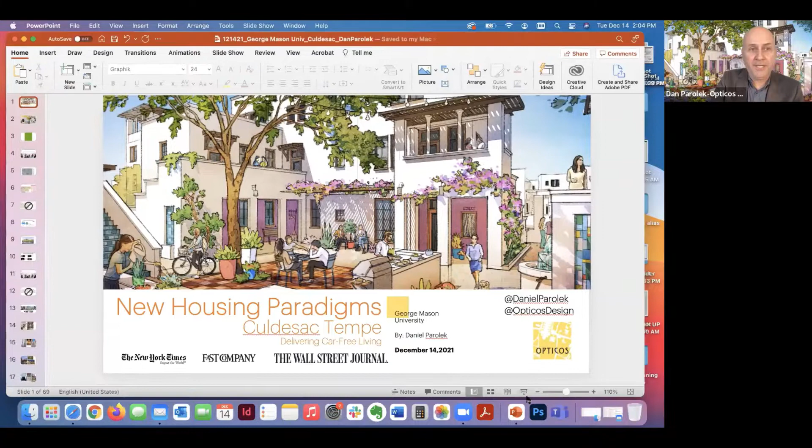Well, thank you, Eric, and good evening to everybody. This is a topic that I'm always excited to present and discuss with a diverse audience, different people with different backgrounds. So just a couple of things: Culdesac Tempe will be the largest car-free community built from scratch in the United States when it's completed. Super excited about that.

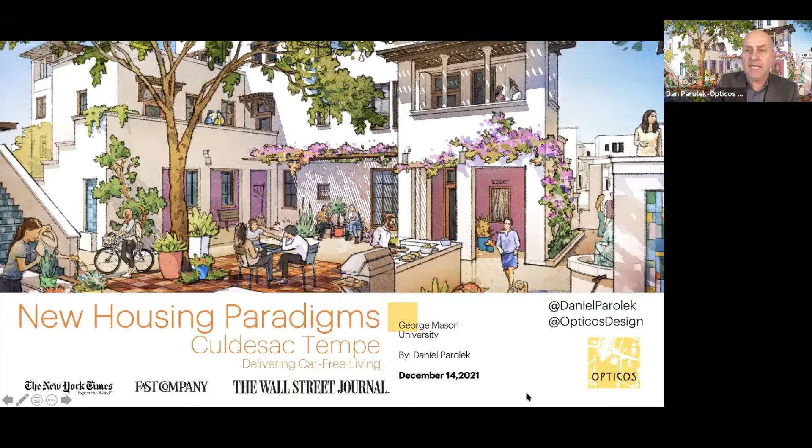If you are into social media and doing any tweeting, feel free to call me out at Daniel Parolek or my company's Twitter account at Opticos Design while I'm going through the presentation today. This Culdesac Tempe project has gotten a tremendous amount of press and interest, which I'm always excited to see, including some of the big name publications you see along the bottom here. I'm always happy to dive into discussing a little bit of the history and the design approach and program for this particular project.

As Eric mentioned, I just want to say one thing: I'm the founding principal of Opticos Design. We just celebrated our 20th anniversary. I started Opticos because I wanted to work at both the architecture and the urban design and planning scale, and I've been able to do that for the past 20 years as my company Opticos has grown.

We work with both public sector clients and private sector clients across the country at a variety of scales, ranging from a 1-acre cottage court infill with a developer like our River House project in Healdsburg, California, to a citywide comprehensive plan update with the city of Memphis. So the work ranges across a pretty broad spectrum of scales, and I have a very talented team that works with me on all these projects.

We're also a founding B Corporation, which means we are committed to a triple bottom line of social, fiscal, and environmental responsibility, not only in our projects but in all of our decision making. That's a really important foundation for us at Opticos. It has been for the past 15 years, and it informs our business strategy as well as project selection.

I wanted to start off with this little video that was created to give a quick summary of the approach and the intent of Culdesac. Let me just get this started here.

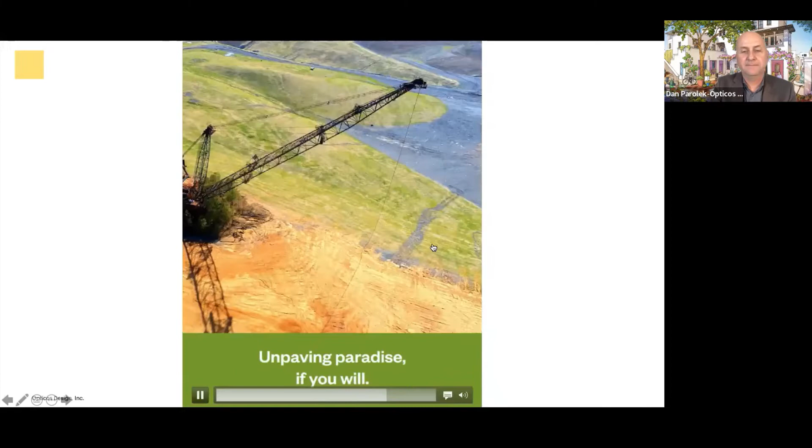So I think that was a really great overview. Culdesac has been a tremendous client to us and a great leader on this project. I feel like this is the type of visionary thinking that is really necessary to deliver 21st century housing choices, and it's been a great opportunity to work with the Culdesac team.

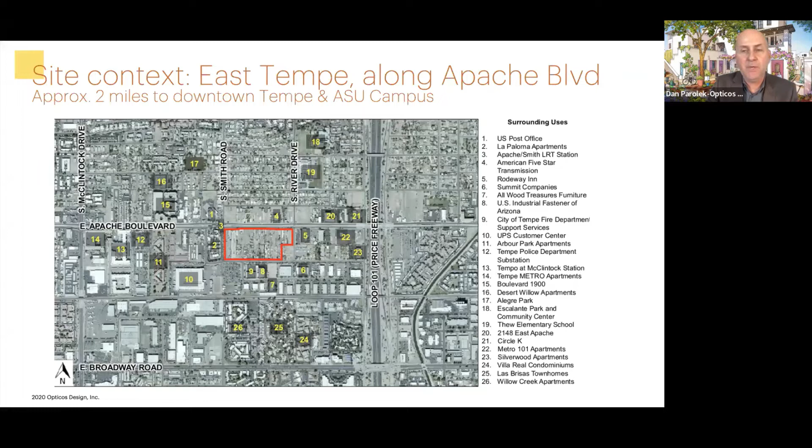As a start, I want to talk a little bit about the program and the general overview of the project. As Eric mentioned, the site is about 16 acres. It's located along Apache Boulevard, one of the major east-west corridors cutting through Tempe. It's also the light rail corridor, approximately 2 miles from both downtown Tempe and the ASU campus—fairly close to those amenities, but in a somewhat undeveloped and underutilized context.

What I really like about the approach that Culdesac tasked us with was that you could very easily attempt to do a car-free project by simply taking the cars out of the equation of an otherwise fairly conventional project, in terms of both product type and the master planning process. But Culdesac really challenged us to think outside the box, not only in terms of the type of place we could create without a car, but also thinking creatively about the housing types we would create.

We wanted to create something different than anything that has been designed and built in the United States in recent history, and maybe even ever. So it was great to get that task of really thinking outside the box on all fronts.

This is an overview of the master plan. It's going to be approximately just under 640 units. The units range in size from 680 to a little over 1,100 square feet, generating a density of about 40 units per acre. I'll do a really interesting comparison later to a previous scheme with 7-story buildings on the site and thousands of parking spaces.

There's about a 30,000 square foot non-residential program, and this was really critical to creating a community with internal walkability, so that day-to-day services and amenities could be delivered within the mixed-use component at the center of this community.

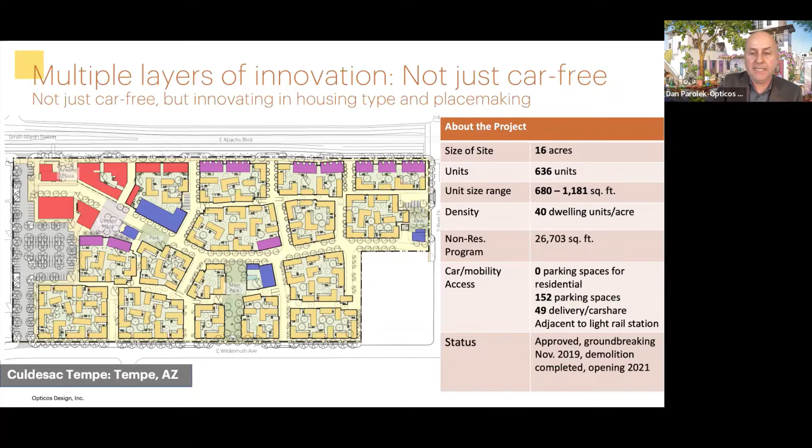I'll talk a little more about the construction, but the groundbreaking actually took place late last year. You'll see some really great slides of the progress being made—it's really exciting to see the project go vertical as construction begins.

As that video showed, one of the primary issues for Culdesac was thinking about the environmental impact of our transportation choices, given that transportation is the main source of our greenhouse emissions, with buildings secondary. A thoughtful approach to removing the automobile from the equation can go a long way in reducing our carbon footprint and greenhouse gas emissions, which is a fantastic way to look at the sustainability component of this project.

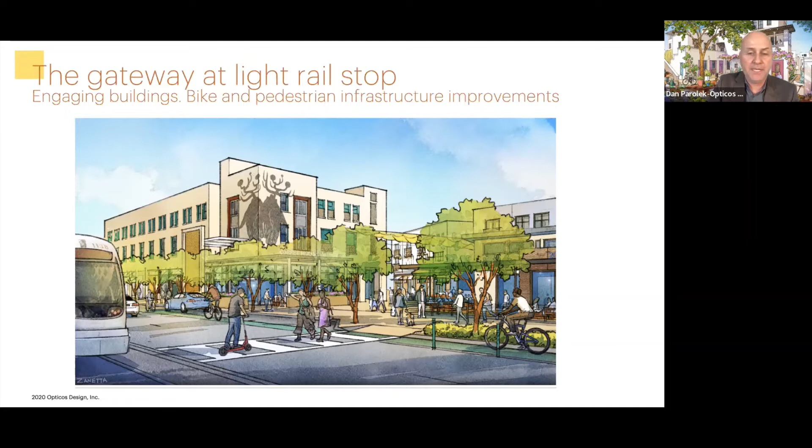Just diving down to a street level view, the site is right across the street from the light rail station, the Smith Martin light rail station. So it was very important to think about that transition from the light rail platform across Apache Boulevard into the project and into the community, thinking about an appropriate gateway that welcomes both residents and visitors into the community. Really important thought process.

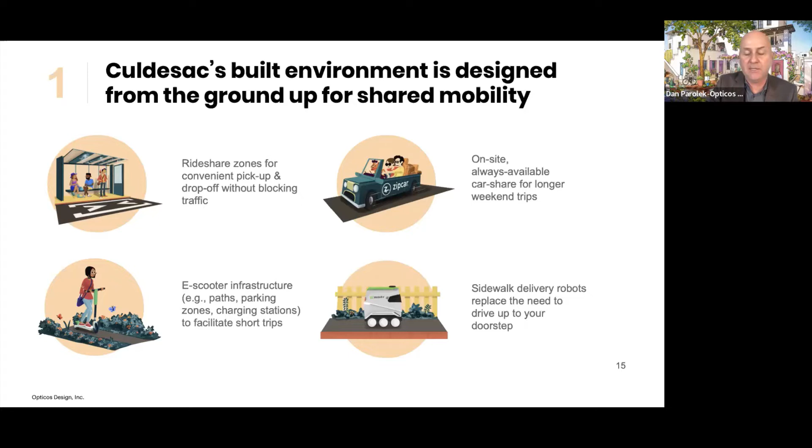Also, there's this idea that the project is car free, but more importantly, the thinking was the project would ultimately be mobility rich. They had this concept from the very beginning to create partnerships with different mobility companies to deliver a palette of mobility choices to their residents. I'll give you an update later on the successes they've had in delivering those choices.

In terms of design inspiration, what we always like to do is step back and think about the types of places that inspire us aesthetically and experientially. In the case of Culdesac Tempe, we needed case studies in placemaking, urbanism, architecture, and public spaces that would mitigate the extreme desert climate inherent in this site, making sure someone on foot, on a bike, or on an electric scooter could comfortably navigate the community with a primarily shaded experience.

As I was thinking about the types of places I've visited or traveled to recently, a lot of historic centers came to mind, whether in Spain, Italy, Egypt, or somewhere in South America, where it might have been 100 degrees outside in summer, but it was quite comfortable walking down the streets because the buildings provided a fairly continuous shaded experience, along with slight breezes and other elements that made the pedestrian experience comfortable.

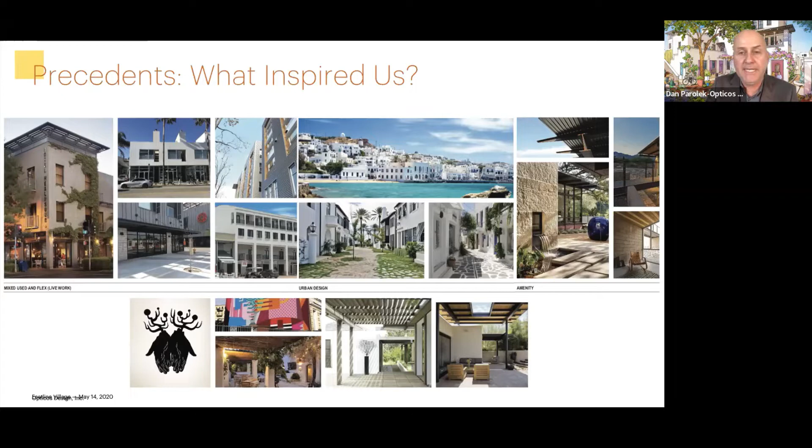So we looked at a broad range of different places, different types of architecture, different elements to deliver that experience. Of course, shade was a number one priority. What we explored very carefully were the different ways, both formally and informally, that we can provide shade, whether you're navigating the site or sitting and entertaining within one of the courtyard or small plaza spaces. It became a really important aspect.

What you'll see as I show you more of the actual design is this idea of the really narrow paseo, small like this image on the right, with 8 or 10 feet building face to building face. This became a really interesting prototype for us to learn from and integrate into the project as a way to provide a shaded experience as you work your way through it.

These are just some of what we call the precedent images, or inspiration, and everything down to the types of signage and art integrated into the project became really important for the Culdesac team and for our team as well, as we thought about how you would experience this place and how it would really encourage and foster a strong sense of community.

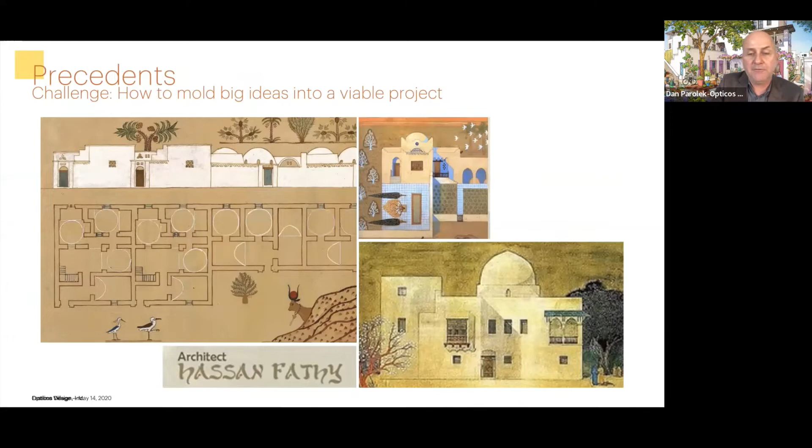One really interesting architect we studied was the Egyptian architect Hassan Fathy, who's done some really beautiful work in Egypt that responds very specifically to that desert climate. There was just something really evocative about his work that we liked and wanted to implement into the project, both from a functionality standpoint in this desert context as well as aesthetically.

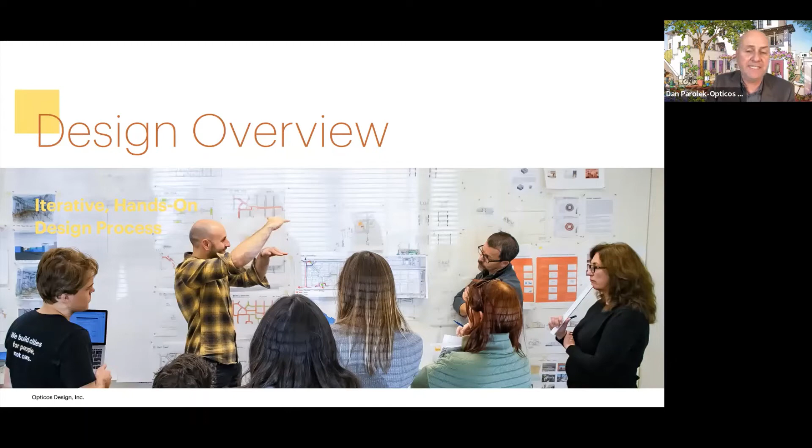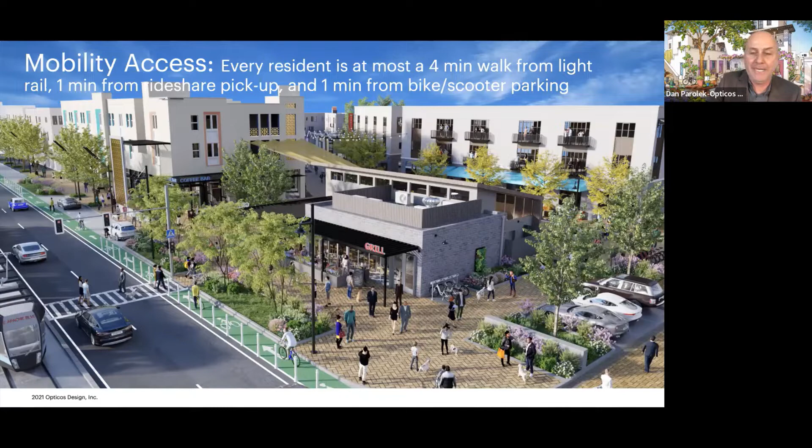This reinforces the fact that every resident within the community should be within a 4-minute walk from light rail, a 1-minute walk or bike from a rideshare pickup, and a 1-minute walk to a bike or scooter parking station. Those mobility choices are really important and thoughtfully placed throughout the community as we were planning it.

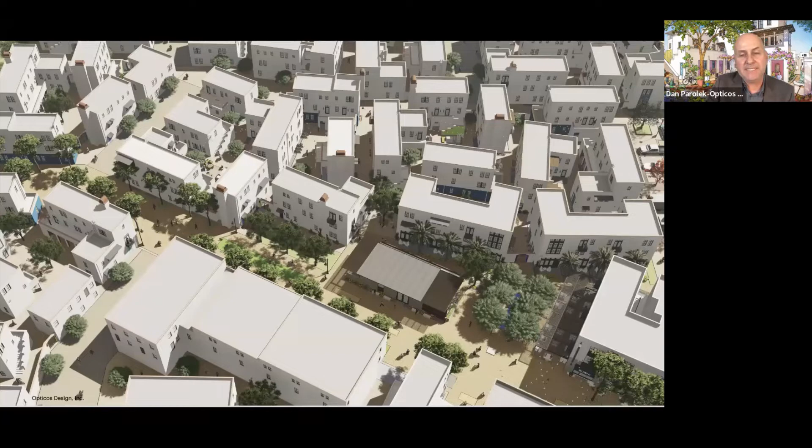This is a low aerial view showing the main plaza space along the primary east-west paseo, where the commercial or mixed-use component is focused, starting at the gateway plaza and working its way into this main plaza space. We wanted to keep the plaza space small because of the heat issue, and provide a lot of shaded areas and sub-areas within the main plaza for a comfortable experience even in the hottest weather.

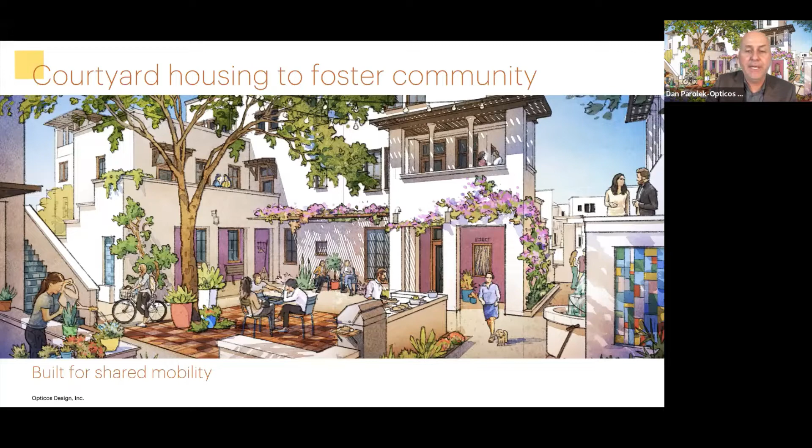We did a lot of shade and shadow studies in SketchUp and integrated those into our thought process. This video is a bit crude, I apologize, but it gives a good overview of what it would be like to walk from the light rail station down the major paseo into the main plaza space and then into one of the inner block network of courtyard spaces. So let me play this for you.

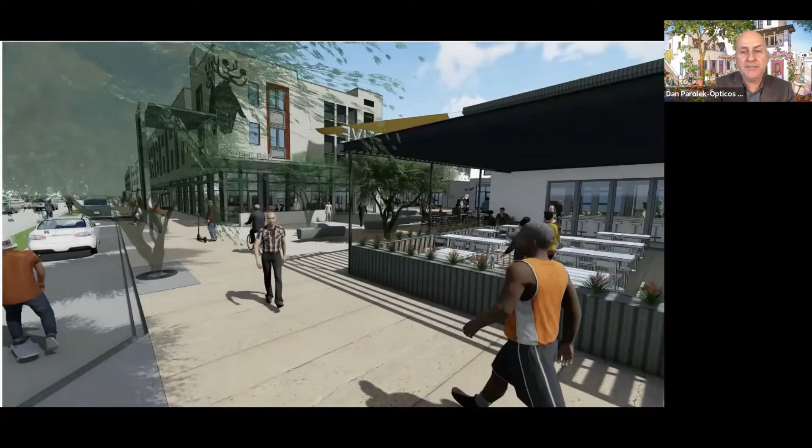I'm going to narrate this a little bit. On the right, you see a restaurant, which already has a tenant. On the left, you see the coffee shop and co-working space; they have a tenant for the coffee shop already that I'll talk about in a bit. There's a small market right in front of you in that 3-story mixed-use building, which also has a tenant.

You're working your way down this main paseo with a shaded arcade on the left, into the main plaza space, where there's a small, iconic hosting building in front of you that can host small events, yoga sessions, other exercise, or small parties. You can see these uses are very much activating this main space, with lots of places to sit.

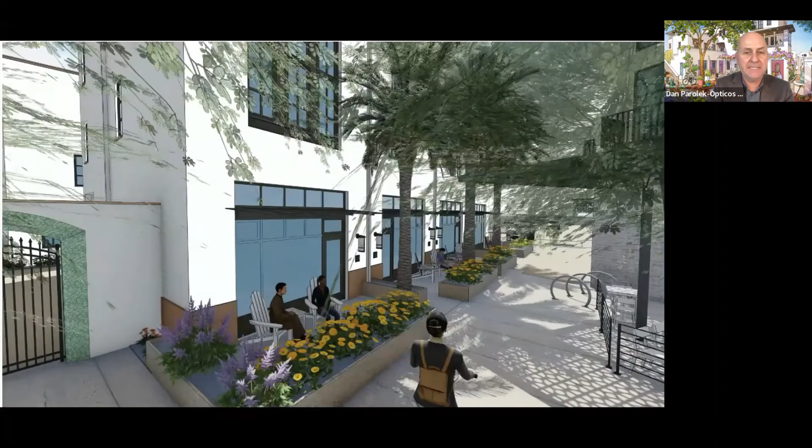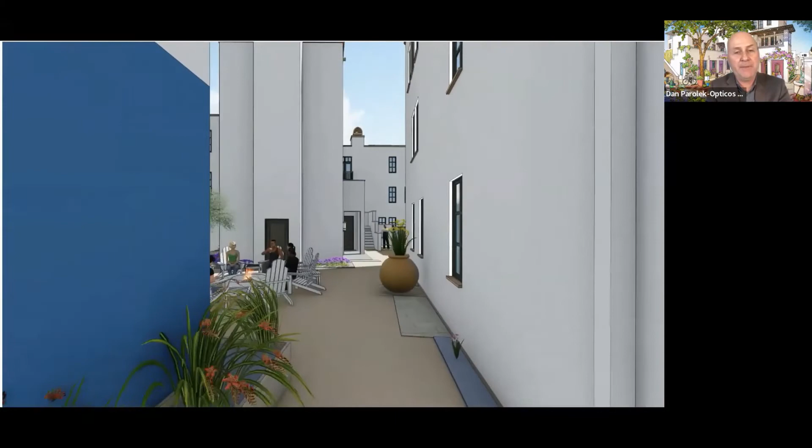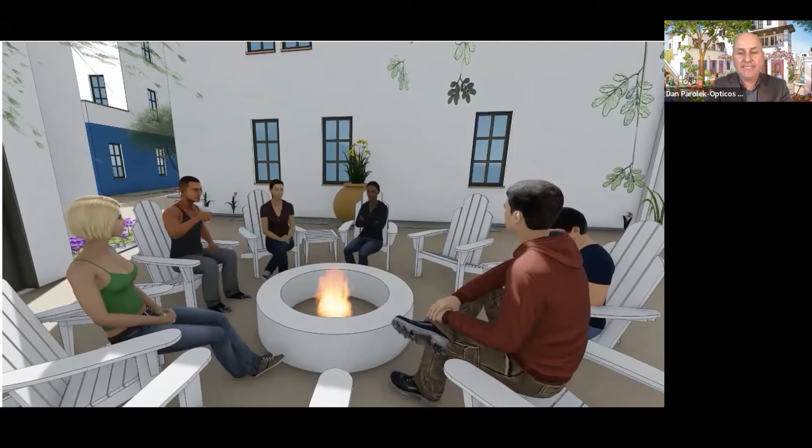These are live-work spaces on this particular edge as we make our way into one of the small passages leading into this series of courtyard spaces within the block. We're working our way through to the primary courtyard—every block has one designated primary courtyard space that's a bit larger and more programmed than the other spaces, similar to what you saw in the rendering behind me. You can see a bit more program here and get a better sense of the scale and the porosity of the different ways to get into and out of these sites, and how the units activate the spaces. So that's just a neat overview.

Architecturally, I put these in here because I knew there'd be some architects. We created a unique system of repeatable building types with these primary 4 types. There's a bit more than this, but these are the core types—a simple combination of 2- and 3-story bar buildings with a range of different unit types and sizes, put together in different ways to create those series of courtyards and to engage and activate the paseo spaces.

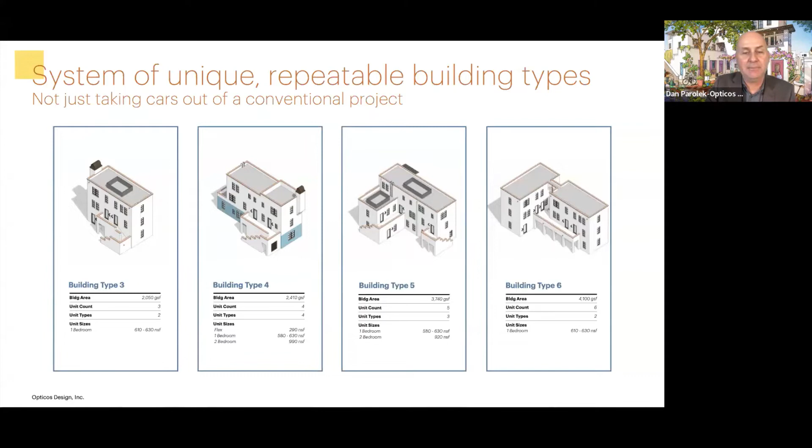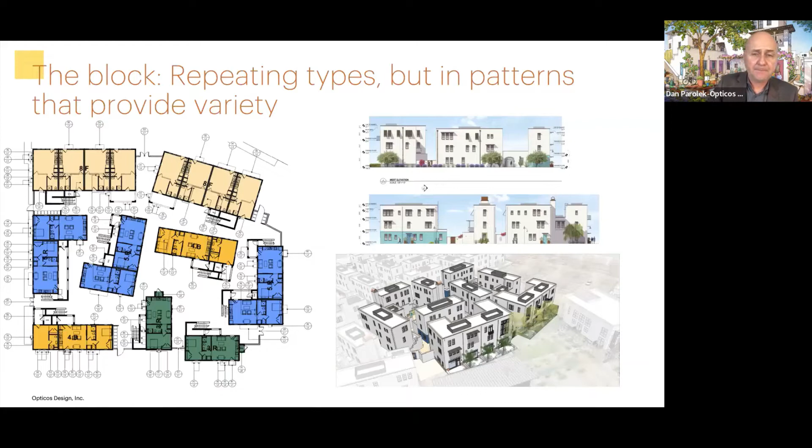And you can see here, this is just one example of a block, and each color represents a different one of those building types. This is actually the block we walked into in that video, entering at the upper center part and through the project into the main courtyard space. You can see a series of intimate, thoughtful spaces activated by the units that provide a variety of scale and texture as you experience the project.

What I'd like to say about the architecture is we wanted to be really thoughtful and restrained on the architecture itself, because we felt the buildings should play their role as fabric buildings, really just background buildings that define and activate the spaces. You'll never actually see these buildings in elevation like this - you're usually seeing them at a really tight oblique angle. So they're really about defining and activating those paseos and courtyard spaces.

And everything on the right-hand side, you see a number of a palette of shading elements that we created to put on the west-facing and southern-facing elevations, primarily to shade and passively cool the buildings.

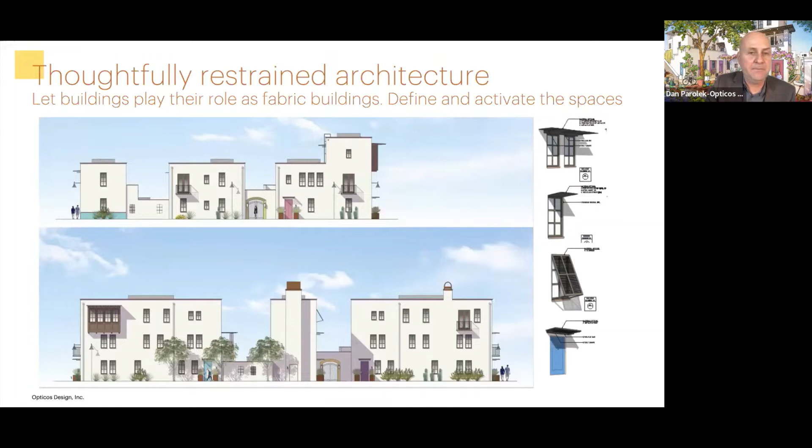All of these units are only one room deep. We felt this was a really great idea to maximize natural light, but also to provide cross ventilation into the units, making them more comfortable to live in without having the air conditioner on full capacity all hours of the day.

I want to mention the process was really fun. We actually scheduled a series of multi-day internal design charrettes in our offices, which included the Culdesac team, but also a range of multidisciplinary consultants, including a landscape architect, Floor and Associates. Chris Floor's company out of Phoenix was an integral part of the team, a great collaborator.

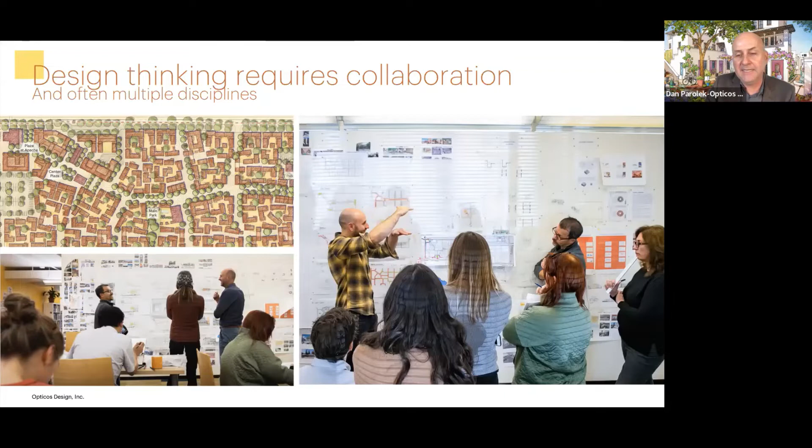We also worked with a retail consultant, Lorenzo Perez, who helped define the types and sizes of spaces that would be viable in this type of project in this market. And a series of other construction and development consultants helped us refine our designs, crunching numbers to make sure the project would ultimately be feasible to construct.

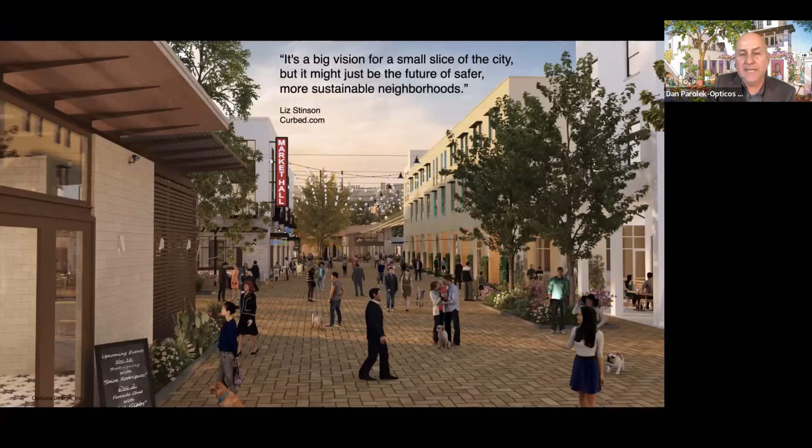This is just a really nice view looking down that main paseo, with the hosting building on the left, the main plaza just beyond it, and looking toward the light rail station and the restaurant building - now mostly completed construction-wise - that takes you to the light rail station. So just a really interesting project.

So a little bit of a focus on the site plan and the public spaces, because we were able to remove cars from this equation, over 60% of the site area is allocated to public space - whether a small plaza, a larger plaza, small paseos, a series of different courtyard sizes, a small park, dog park, or pool area. It's really nice to be able to open up the opportunities for high quality and a large number of public spaces by removing the cars.

Here are some process images of early sketches showing potential arrangements of the blocks, the paseos, and the public spaces - initial concept sketches beginning to demonstrate the character and quality of the large and small paseos, the articulation and simplicity of the buildings, as well as the circulation of the project.

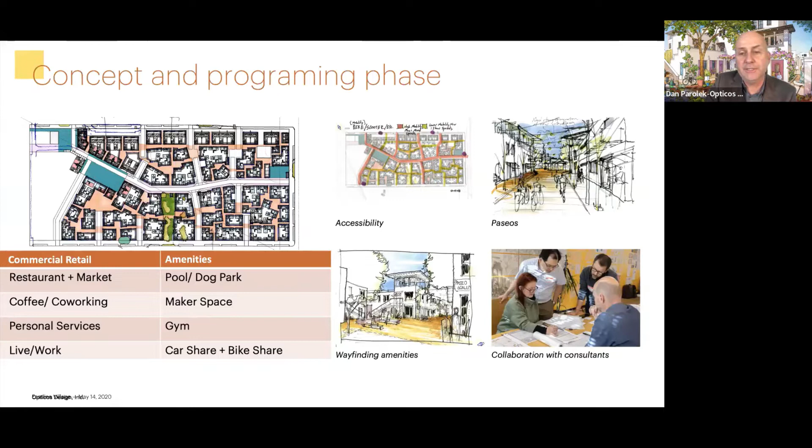I've mentioned this a number of times, but this is a great image that illustrates this idea of a network of pedestrian-only paseos. They'll be decomposed granite primarily. The units at the ground level enter off of the paseo, but also have access into the courtyard space as well.

There'll be landscaping along a number of the edges along those paseos, but also landscaping from within the courtyards creeping over the walls, like you see in a lot of the examples we showed, creating really interesting vistas that draw you through the project. You can see that little chimney element on the building at the far end - people out on their balconies will also help activate the space.

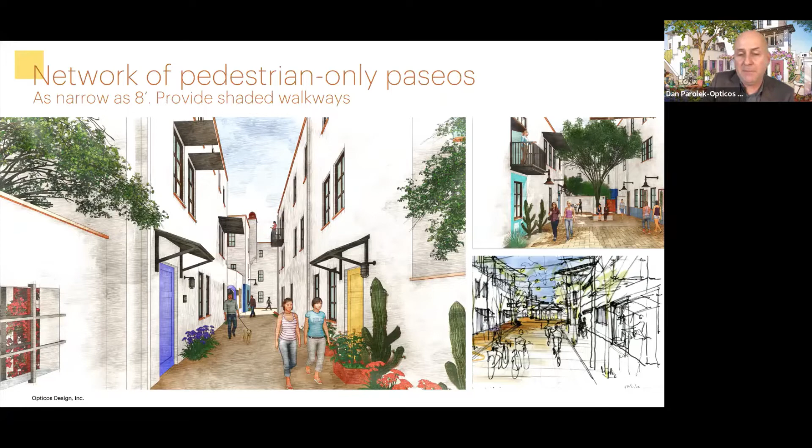As I mentioned, the paseos are as narrow as 8 feet, and we felt that was enough to provide a comfortable proportion of space, but also small enough to provide shading for large portions of the day, even in the summer.

So you can see this is just a different iteration of the project. In that upper left-hand corner, in that darker red where the light rail station is, the dark red represents ground floor commercial, retail, food and beverage uses, about 30,000 square feet.

You can begin to see here the different block structures and the paseo structures as you work your way across the main area. Let me just do a little annotation here for you.

As you work your way through this main east-west paseo, that's the organizer I talked about. There's a series of slightly wider secondary paseos that work their way into the site, either from the edge or integrated for emergency access. You can imagine the puzzle we went through. There's also this secondary hierarchy of paseos - the 8-foot ones - that give you really interesting experiences as you walk through this project.

So it's a really fine-grained network of opportunities to navigate the site.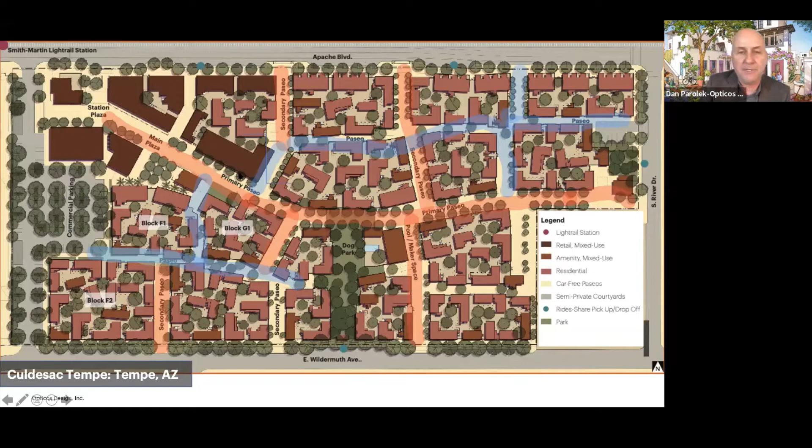I thought I would share this diagram. It's a little bit technical, but this simply illustrates the fire access approach. Sorry, let me erase my other lines.

You can see on this what I mentioned earlier - we had to be really thoughtful about fire hoses reaching every element of this project, but we wanted to make sure the widths required for emergency access weren't compromising this pedestrian-only experience.

We really spent a lot of time and energy working with this and with the fire department, as well as the other emergency access folks in the city of Tempe, to make sure we came up with a solution that worked for them but didn't ultimately compromise the vision we had in mind for the project.

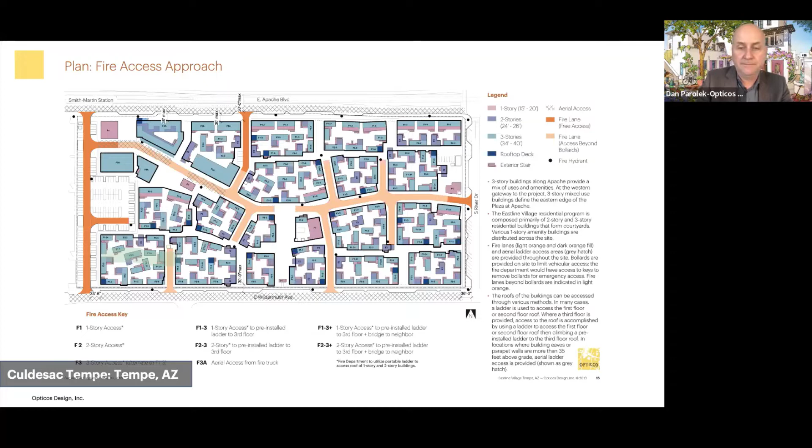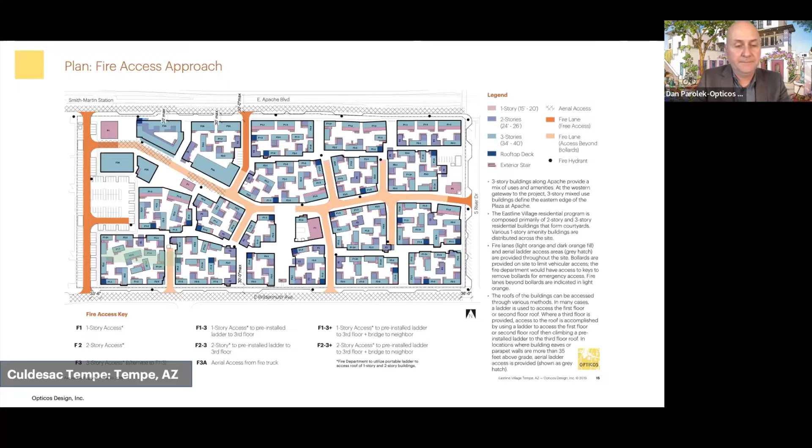Sorry, I seem to be locked up here a little bit. Give me one second as I try to get my pointer back. Here we go. Sorry, my cursor - give me one second. I'm going to pop out of this and pop right back in. My cursor seems to have disappeared. Sorry about this.

This is the first time this has happened, but I'll do this on the fly. You can see there's the design vision and design intent, but there's all the technical aspects, whether it be emergency access or even just the integration of infrastructure into underground systems, that became a real technical and design challenge - it was actually really fun to work our way through.

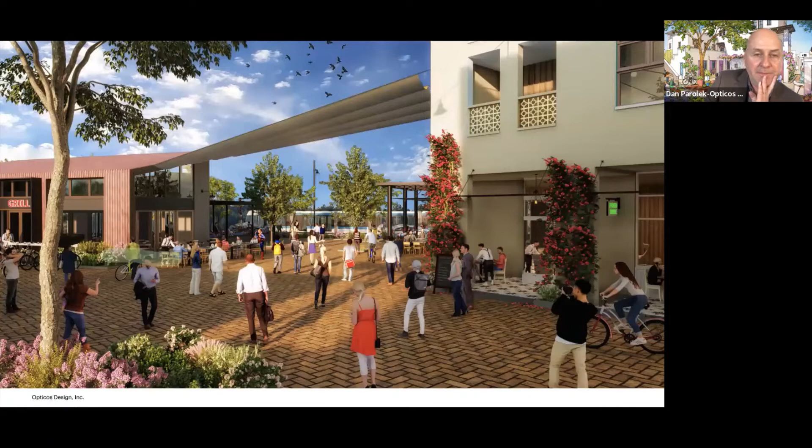During the process, here's just another view of a paseo - a view from the entry plaza to the light rail station. And then just a quick thought about entitlement.

The project was actually part of a pre-approved planned area development plan, which you can see with phase 1 area in orange, and phase 4 and phase 2 where the Culdesac site is. So the process was going through and amending this pre-entitled PAD.

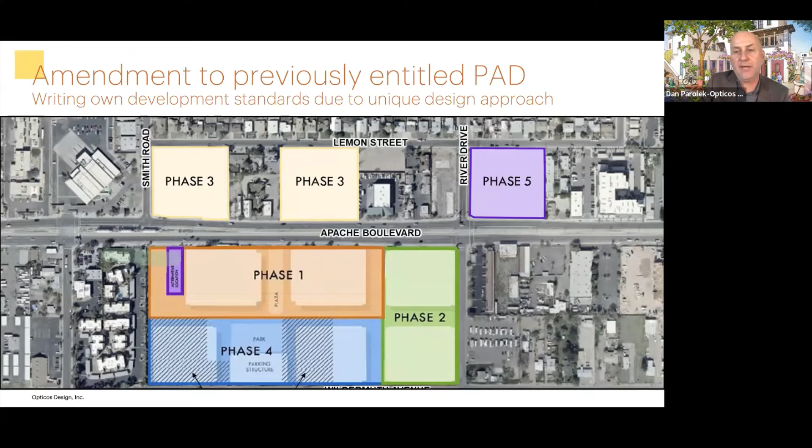We basically had to write our own development standards due to the unique design approach and nature of this particular project. I can answer questions about that.

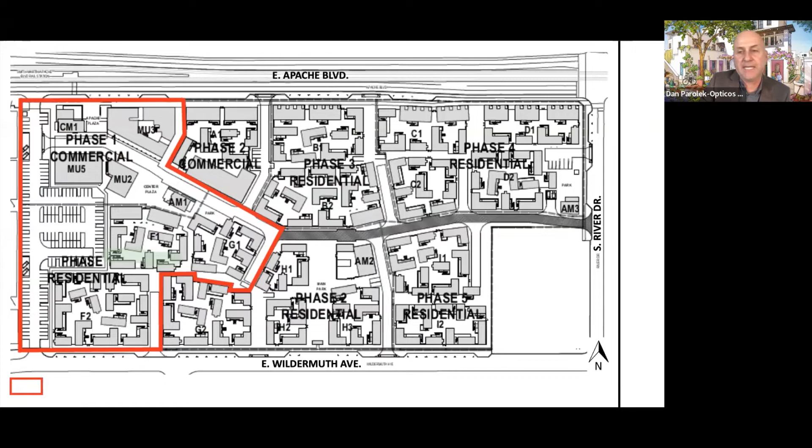In terms of progress, this area in red designates phase 1. In particular, that phase 1 commercial piece is actually what Culdesac decided to build first, and we can discuss that as well.

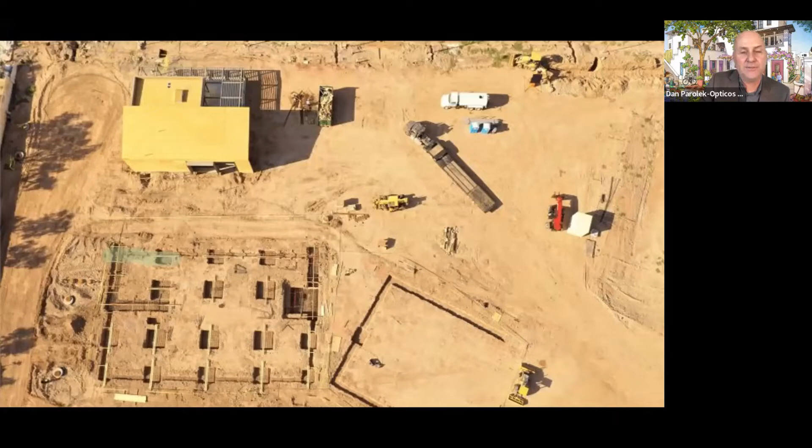This is just an aerial image of that Apache Plaza with the restaurant under construction and the market building under construction. What's really interesting about this is this project got a tremendous amount of interest.

It had 335 million press impressions when it went public in November of 2019. And great progress is that Culdesac was actually able to negotiate partnerships with organizations like rideshare, Valley Metro, Envoy Car Share, and micromobility with Freebird.

They're going to be delivering a mobility suite worth about $3,000 a year to their residents. So once again, it's car-free, but the reality is a better term is mobility-rich. And I really like this aspect.

It's really pretty interesting that there's 151 residents who've put their names on a wait list with a $100 refundable deposit, but there's 3,300 people on an interested list.

I know that Culdesac actually started renting fairly recently, within just the past several weeks, and I wasn't able to get that updated information, but the first group of units leased in a matter of hours. So it's looking like there's strong interest.

A large majority of the phase 1 community members are moving from out of state to live in this project, showing the real demand and desire for people to live car-free, but in an environment that's this neighborhood or missing middle scale. There's a pretty broad range of residents interested, ranging from young professionals to empty nesters, and some young families as well.

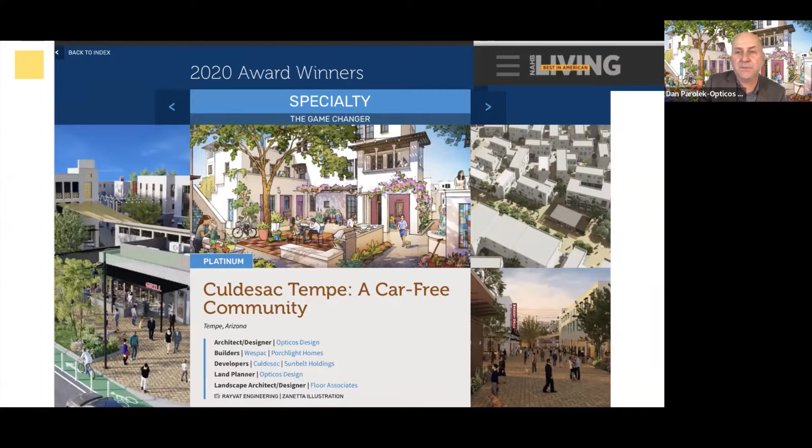So let me show you this slide. That's the latest, from November, of progress on the site.

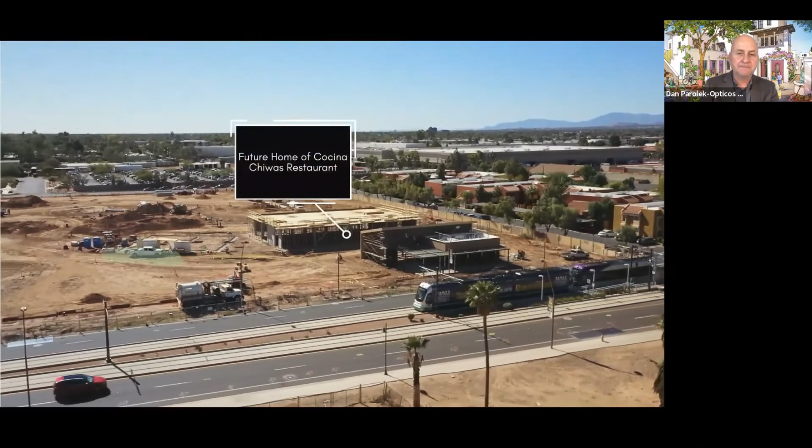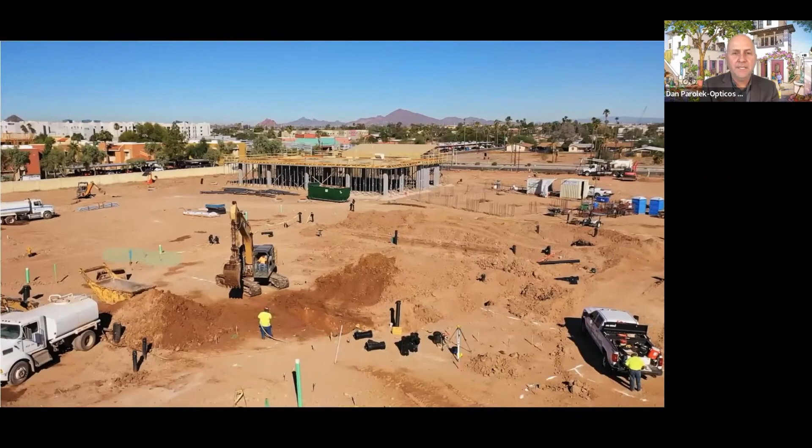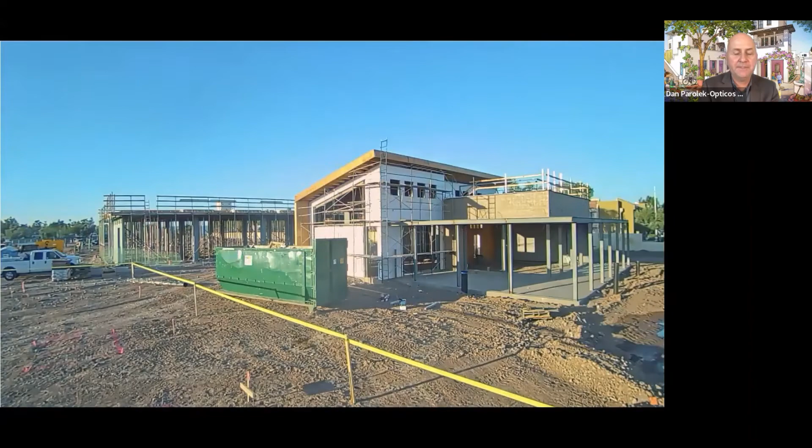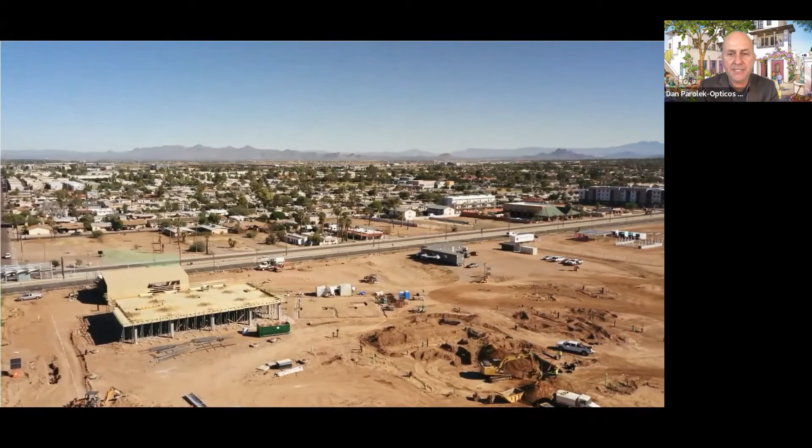This is the mixed use component, which is actually quite a bit further underway now, with the second and third mixed use buildings having their concrete podiums poured. You can begin to see the shapes and public spaces take shape. This is the first of the pedestrian or courtyard housing blocks, where they're doing the underground infrastructure. So that's just a really nice glimpse.

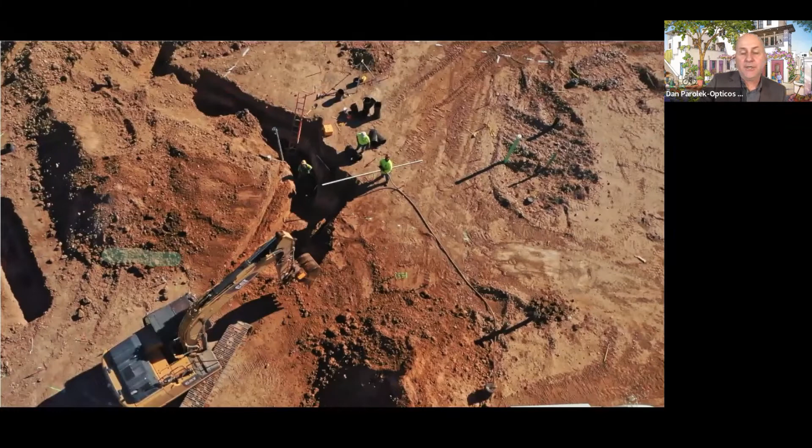It's super exciting to see the project under construction, and also to see the really strong interest and response from renters. I'm going to close up with just a few concluding thoughts here.

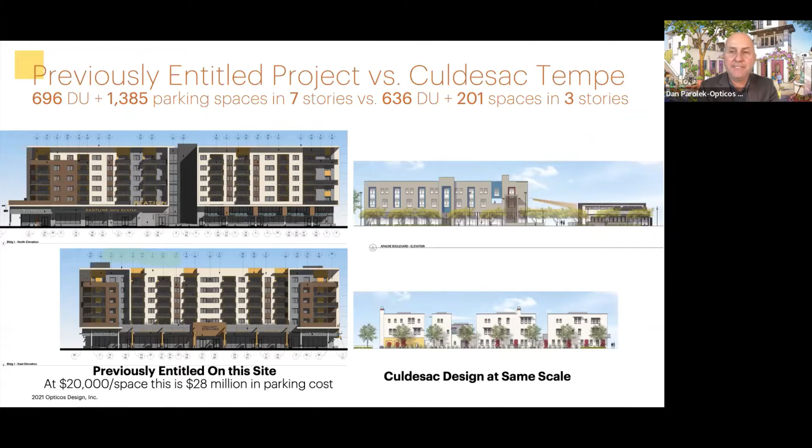So this is another really interesting way to achieve medium densities and deliver a really high quality of life, but do it at a smaller, more intimate neighborhood scale, and deliver that high quality car-free living.

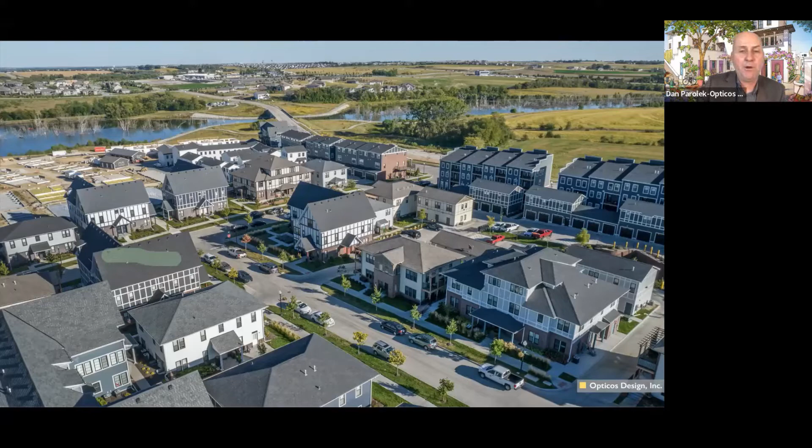The other thing I want to mention is we're innovating with other projects in the country. This is a missing middle neighborhood that we master planned and developed the architecture for in the Omaha, Nebraska metro. It's triplexes up to 8-plexes, and it's all for rent. It has redefined the top end of the rental price points in the Omaha metro and has been extremely successful for our client. It has proven there is viability in Class A multifamily for thinking about smaller house-scale missing middle buildings laid out in a neighborhood format, as opposed to larger scale garden apartments oriented around parking lots. So Eric mentioned this earlier.

Thank you, Dan. Really interesting project. There's a couple of questions already, so for those of you that have questions about anything in the presentation or anything Dan has said, please feel free to pop it into the Q&A button on your Zoom share. First question from the chat.

Somebody was curious about the masonry screen details. It seemed like every other opening on the arcade had a masonry screen detail. Was there something behind that, or was it just an architectural detail for the property? That's a super interesting question. I've never had anybody notice that, but we did design that building, so I'm super aware of it. The arcade, we were limited on depth due to the compact nature of the site plan, and we wanted to maximize the shading for pedestrians as they work their way through the arcade. That's why we put the masonry screens on every other one of the arcade elements. We saw some really great precedents in desert cities that did that, so we wanted to integrate it mostly for pedestrian comfort and functionality of that arcade space.

Was there a required affordability program for this project? If so, what is the mix of market rate versus affordable rate units? There is not a required affordability component, the city doesn't require one, so the units will be rented at market rate. I feel like we had discussions with Culdesac early on about ensuring long-term affordability for at least a certain percentage of the units, because they were innovating on so many other aspects of this project. They wanted proof of concept first before formalizing that affordability component, but I'm looking forward to that. The units are a bit smaller than what's typical in this market, and what we've found in our projects is that even just being 15 to 20% smaller can make projects that much more attainable from a price standpoint. So that's one way we often achieve that, but the short answer is there's no formal required affordability in the project.